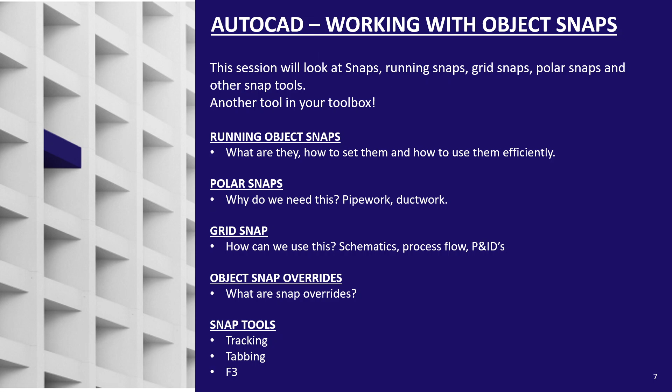So yes, AutoCAD working with object snaps. Now there are different types of snaps: running object snaps, grid snaps, polar snaps, object snap overrides. So what are these? People just say snaps to refer to snapping onto the end point of a line, for example. But there's more to it than that. Okay, so let's have a look then at snaps.

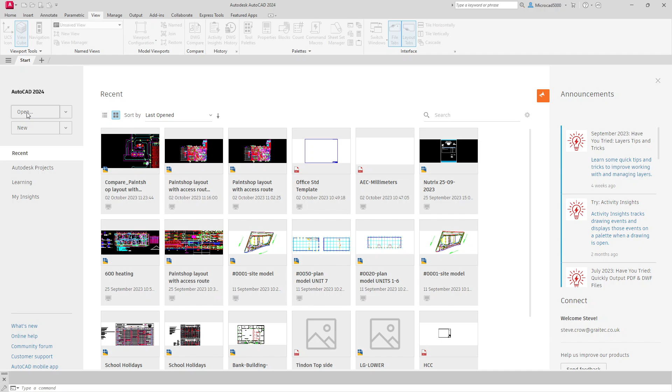Right, let me get into my AutoCAD. So, first of all, let's just look at the bog standard running object snaps. Now, I know some of you may not have used AutoCAD already, but if I just go to open a drawing file, I can open a drawing file here. I'm just using my training file. Why reinvent the wheel? This one here, for example.

So we're going to draw and snap to the center of these circles using what are called running object snaps. Now the snaps are down in your status bar at the bottom there on what are called the drafting aids. That's this bar down here. Now you might notice on mine I have a lot of options displayed down there. Be careful, because out of the box, not all of them are displayed. And some of these settings will slow your machine down when you are working.

So you need to go to the three bars in the corner, click on that, and make sure every last one is ticked, so you can see which ones are active. And this one here is the running object snaps. It's active now, look, because it's gone blue. But notice everything else is turned off. The only one that you would have turned on is this one here. Now I've got it turned off on mine because I've got issues with my graphics card on the machine.

But anyway, little arrow at the side of the running object snaps, and it lists in there the snaps which are active: endpoint, midpoint. A lot of these are self-explanatory, so I'll just run with those for now. So I've got center turned on, look. So it will snap to the center, and also the endpoint snap at the top there is turned on.

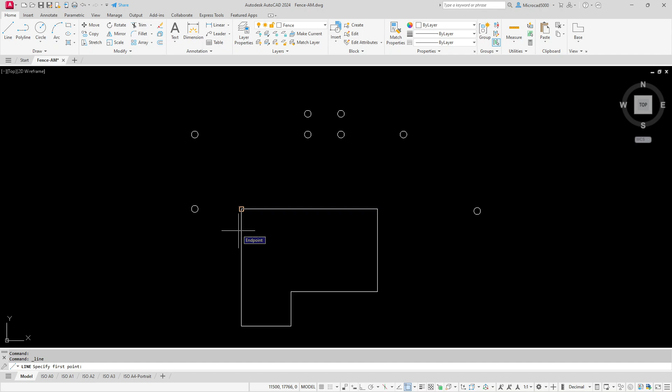I might be telling some people things here that they already know, but bear in mind that there might be people who are logged in who don't know that.

Now I don't need to put my cursor in. It has snapped accurately. Don't try and guess those points. As long as the marker's showing, click. The marker's showing, click, click, click, click. So see how much easier it is to work with these. Click, and there we go. So those are your running object snaps. Okay, so you can snap around there.

Now I'm going to turn on another snap, and I have polar turned on to keep it drawing horizontally. And I'm going to turn on my intersection snap. So where my cursor intersects something else, it'll pick up an intersection snap. So now I can draw a line from the midpoint there, look. My cursor's not in the box, doesn't need to be. There's polar kicking in. When it intersects there, click, it'll find the intersection snap. Midpoint, intersection, down there, look.

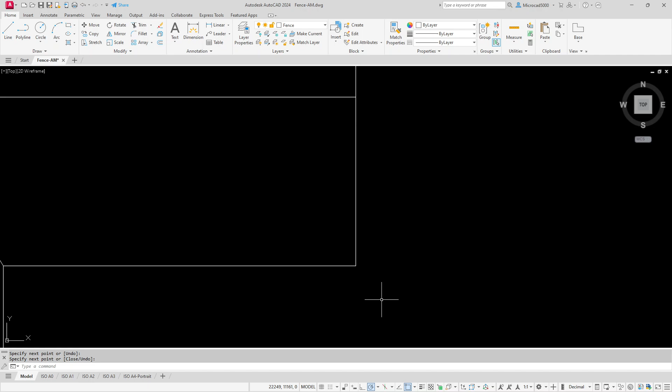Now there's a snap in here called extension. So what does it mean by extension? Let me show you. Okay, so in here, supposing I need to put a rainwater pipe, which is stood off from the corner of the wall there. If I go to draw a circle, go near the end point, if I was to click now, it would click onto that end point and draw my drain pipe in the building. That's no good.

Now with the extension snap turned on, I can hover over that corner, I put my cursor inside the box. When I move away, you can see it's left a blip on the screen. When my cursor's horizontal or vertical, in line with that, i.e. extended, I could say type in a distance of 200 and it will start drawing that circle 200 away. So 200, press enter, and there it is, 200 away. Now it's a 100 mil down pipe, so I type in the radius 50 mil, and there's my rainwater pipe 200 mil away, or however much I set it away from that.

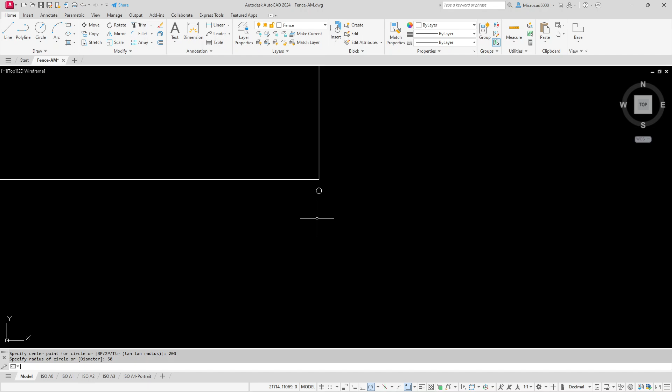It also works on sloping lines. So here, for example, if I say draw a circle and put my cursor on that one over there, look, it's put the blip on, there it is, lining up. There's the extension snap again. Okay. Now if I put my cursor back over that marker, it turns that blip marker off. So now it's not finding the extension snap anymore. So put your cursor over the marker there and it's turned it back on again, look.

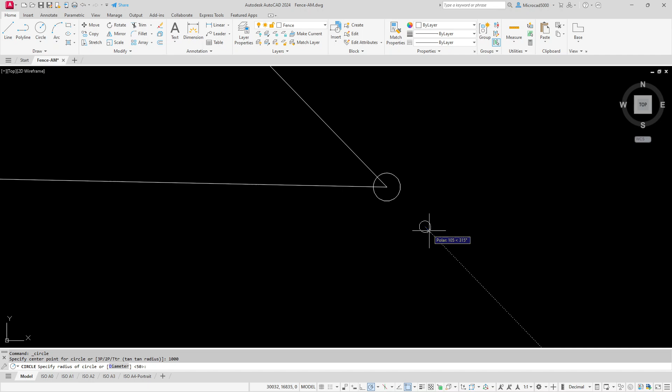So if I type in 1000, it's starting that circle exactly a meter away from that corner with the extension snap down there, and it pops it in there, and I'll put another one in there. I know it's probably a big distance away now. And here, look, I'm going to use the extension snap to follow this wall plate across. So draw a line, hover over the corner, line it up across there, follow the wall plate across, and go up that valley there. So they are your running object snaps.

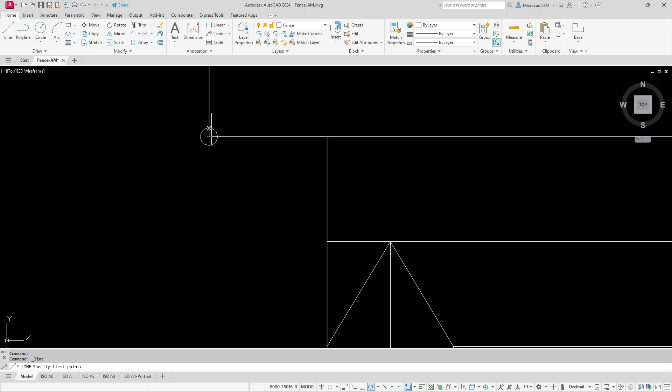Now, that's all well and good using these running object snaps. But what if it snaps to the wrong point? It gets the midpoint instead of the end point or something else. So, for example, supposing I want to draw a line from here, from the quadrant of this circle. Now, at the moment, it's not finding the quadrant. It's finding intersection, center, end point. There's all sorts of other snaps kicking on there, but not the quadrant snap.

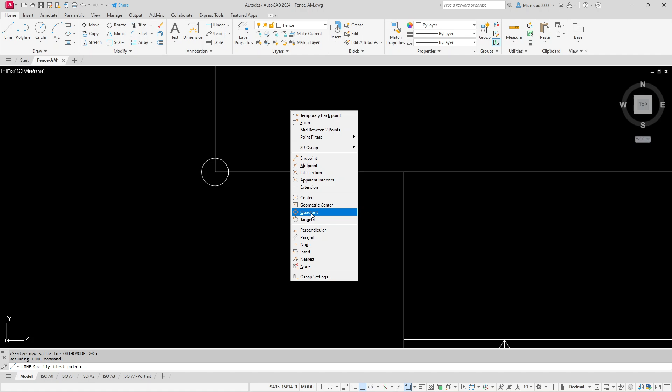So what I can do is I can invoke what are called object snap overrides. And object snap overrides will override the current running object snaps down here. Okay, and one way to do it, hold the shift key down and do a right click on the mouse. And in that list, it shows me a list of snaps, including quadrant. Now, whichever one I pick in that list will override, hence the term object snap overrides, whatever is set in the running object snaps.

So if I select quadrant, it's now turned off center and midpoint and end point and everything else, and it's only looking for quadrants. So if I pick the quadrant, click, I've snapped the quadrant, and now those other snaps have all jumped back in place again. End point, intersection, center, and so on. They've all come back on again. So it only works for one click.

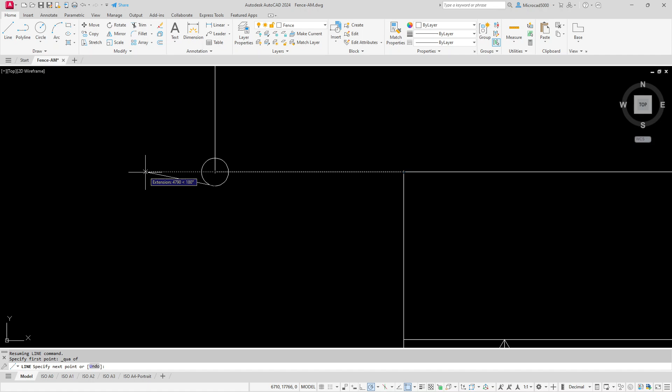If I need to draw to this quadrant here, another shift key held down, right click, let go of all the keys, and there it is, quadrant again, and go and pick this quadrant. So they are object snap overrides. Okay, shift key held down, do a right click.

Let me show you another snap that's in this list of snaps here. One in here called parallel. How does that one work? Let me show you how. I'm going to draw a line which is parallel to this one here. Line command. And draw a line from over here, look. Click. Now parallel is not set, so it's not clicking.

But I can do a shift right click and say, make it parallel, using overrides, make it parallel to this line here. I hover over it, don't click, just hover, and it's left one of those blips on the screen. When this line is parallel to that one, it comes with the construction line and it lights up on the one it's parallel to. Now I can click, and there we go. Those two lines are absolutely parallel.

I could have that set in my running object snaps as well. I'll turn it on there. Line command, starting here, hover over this one, move away, and those two lines are parallel. And I can type in a length of how long it needs to be. I want it to be 10 meters long. And there it is, 10 meters long, parallel to that one.

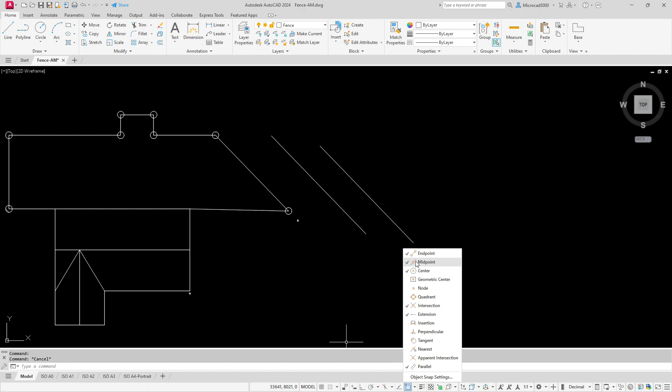So what other snaps do we have in here? End point, midpoint, center, they're self-explanatory. Geometric center, let's look at this running object snap. Let me draw a shape using a polyline. There's a shape with a polyline, C to close. And as we all know, if you use a polyline, this is an enclosed area. In the properties dialog box, it shows you what the area is. So it knows it's got an area.

There it is, look. Now, supposing this is a big concrete slab or a steel plate, I want to pick it up from the centroid, the geometric center of this shape. If I turn on the geometric center snap, I can draw a circle where I would sling this from a crane. There it is, click, and that's the geometric center. If I put that into a lathe centered on that point, it would spin balanced.

Obviously, if that was a big steel plate or a concrete slab, you wouldn't sling it from one point, you'd sling it from the corners, wouldn't you? Although I'm no slinger, the people who rig stuff up on the cranes, I don't know. But there you go, that's a geometric center snap.

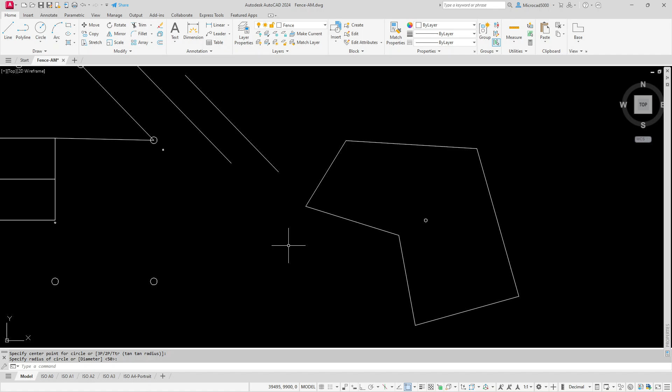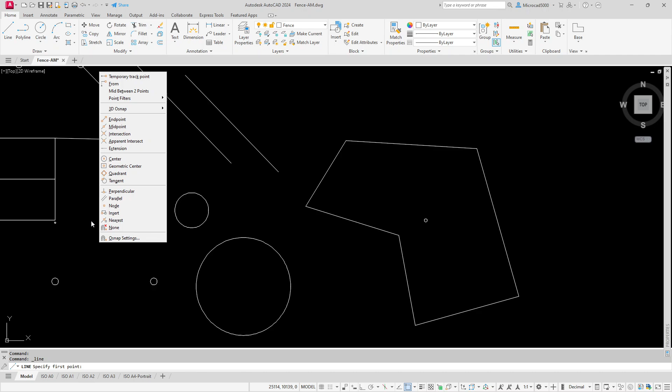What other snaps are in there? You've got insertion point of text and symbols, snap perpendicular to something, snap tangentially to objects. So if I have a couple of circles, there's one circle there, and I'll pop another circle there. I'll do a shift right click, tangent to this one, and a shift right click, tangent to this one. And that is perfectly tangential there.

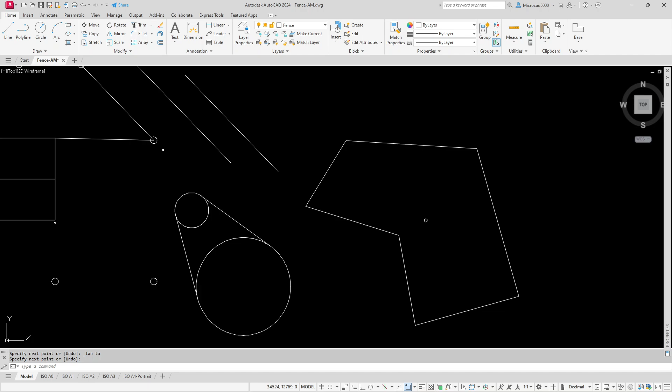Shift right click, tangent on the other side there, shift right click, tangent down there. Oh, wrong way. I messed that one up, didn't I? Delete that one. Let's try it again, a bit more careful. Shift right click, tangent. You need to be roughly where it's going to be. Shift right click, tangent, otherwise it throws a wobbly like that. Garbage in, garbage out. There we go. And then trim it down. There we go.

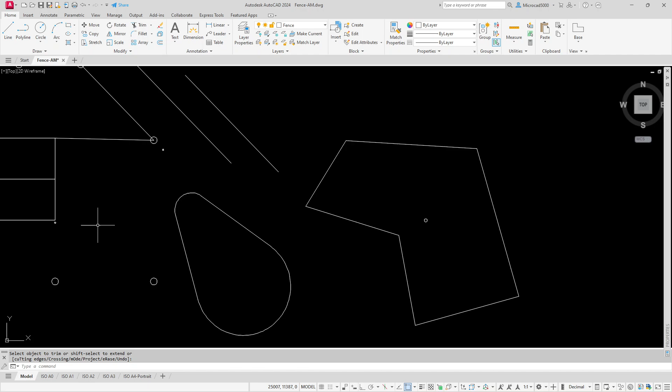Right, what do we look at next? Object snap overrides. So we've done the overrides. Now on the overrides, there's a useful tool, another snap in the override. Watch. If I draw a couple of rectangles there, and then I'll copy this one. Whoops, I didn't mean to do that. Copy that from there with polar turned on across to there. Question for the old hands who use AutoCAD.

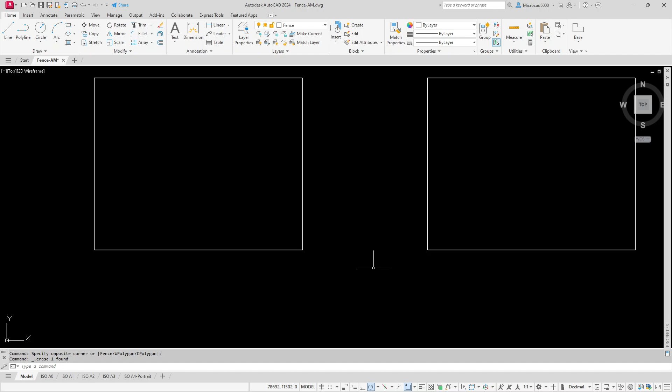How would you draw a line down between the middle of those two? So there's two houses there. You need to draw the garden fence between them, or the fence down there to divide those two properties. What would you do to draw a line in the middle of there?

Well, I suspect a lot of people would draw a line from endpoint to endpoint, endpoint to endpoint, and snap midpoint to midpoint. Yeah, reasonable. You get the required result. But let me show you here one of the object snap overrides. So, line command, shift right click, and there's one in here, look, snap to a point which is midway between two existing points.

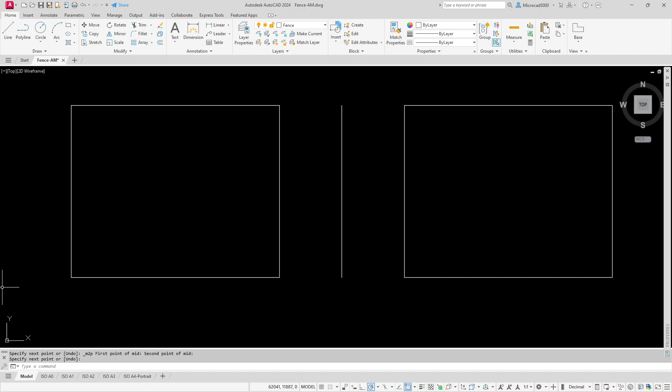Okay, between 2 points. So, the 2 points being this one, click, and this one, click, and there it is. I found the point midway between the 2 points. And shift right click mid between 2 points again, click, click, and there's the center line fence done. Stops any arguments between neighbors sometimes.

But yeah, how easy was that? No construction lines to go back and shift and remove. So on those shift right clicks, some really useful tools. Okay. Right, what other snaps we got in there?

Polar snaps. For you, the HVAC guys, using the polar snaps are really useful for fixing your elbows. So set it to 30 degrees, 45 degrees. So when you are snapping at angles, you don't have to get really weird and wonderful elbows made up specially. So how does this one work with your polar tracking?

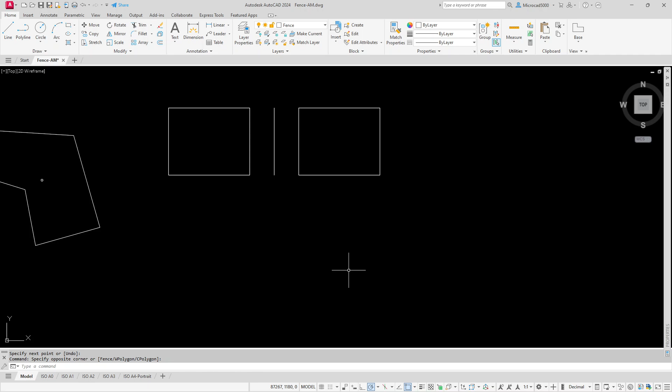Again, I'm just going to open one of my drawing files, and this one is called a drawing called Pattern M. One of my training files. There it is, open it up. Right, turn off the settings down here. Don't need a grid. So with polar then, you are telling it an angle to snap to.

And there's the polar on-off tool, polar tracking, polar snaps. And you can see in here, you have a range of standard angles. So if I go into the tracking settings, I can tell it the angles I want to snap at. 30 degrees, 45 degrees. So you're doing duct work, keep it at 45 degrees, otherwise you're going to get some wonderful duct angles. Or I might do 30 degree ducts as well, I don't know.

If the angle you want is not in this increment list, you can just pick in the box there and type it in there. I'll think of 22 degrees. There we go. So in the list now, we have, oh, okay, I know why. 22 degrees. Okay, on that. I'll look in here. It's gone to 23 degrees. Interesting. I'll just quickly cancel that.

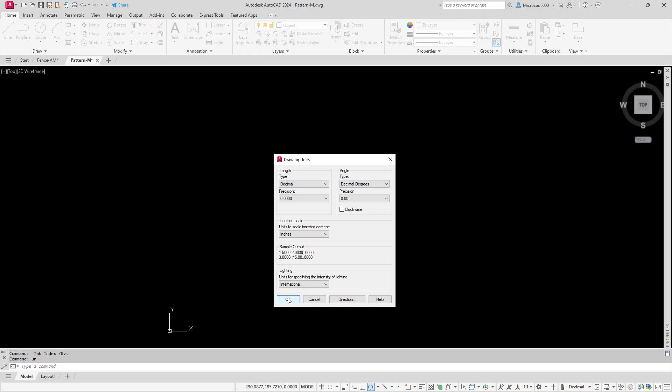Units. Yes, my angle precision is, if I bump my angle precision up, might be better. Okay. Did I type in 22.5? Let's have a look. Tracking settings. No, I typed in 22. Okay, on that.

Okay, don't ask. Right, now I could stop this because it's recording, but I won't. I'll crack on with it.

Right, anyway, for the exercise, I need to have an extra angle in there as well. So go to tracking settings. Down here, look, you can set additional angles. Now, the additional angles are one hit angles. If I turn on the additional angles and type in here 35 degrees, when it snaps around from 0, don't forget, which is at 3 o'clock, it'll hit 0 degrees, then 35 degrees, and then I want to set this increment angle to 45.

An increment angle of 45 degrees, and then 90 and multiples of 45. It won't give me 70 degrees. It's just a one hit angle. So do an OK on that. Oh, sorry, I should just tell something else in here as well. Tracking settings. In here, the angles will be relative to the last segment or relative to the horizontal.

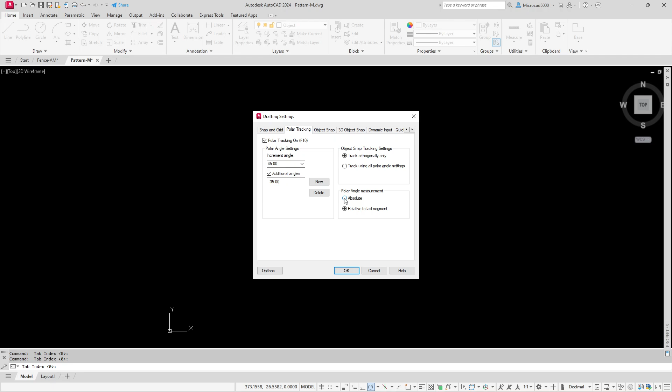Now, if you're a ductwork guy, you want it to be relative to the last segment. So watch out for that. Not a lot of people know about that one. So if the angle is already, say, 20 degrees and your polar angle increment is set to 45, it'll still get you your 45-degree angles on your ductwork and pipework if it's already at 20 degrees. So watch out for that one if you're doing HVAC stuff. Well, anything for that matter. Just be aware of how it's measuring the angle.

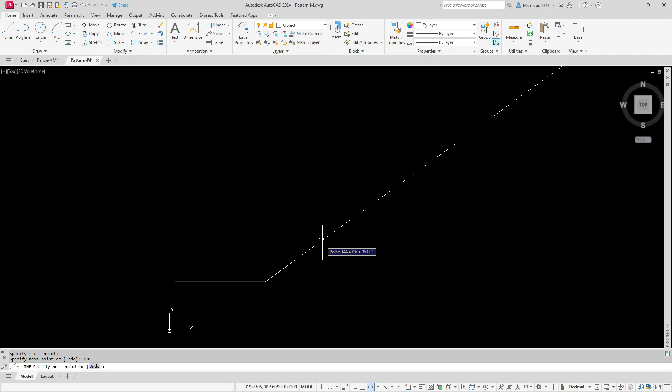Okay on that. Right, so here we go then. So if I draw a line from there, come across, and I type in 190. Okay, so it's drawn across 190. And as I move my cursor around, look, there's 0 degrees. There's the 35 degrees, it tells you on the screen. There's my 45 degrees, and then multiples of 45 degrees, look.

There's 90, and a multiple of 45 is 135, obviously 180. Come back around again, there's the angle of 225, and then 270, and back round to 315 degrees, and there's my back to 0 degrees. So that's your polar angles. Okay, so that's polar tracking with that tool there. Useful tool for doing pipework and ductwork.

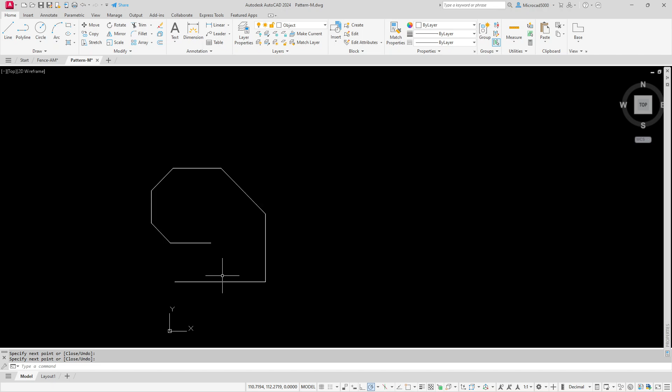Right, now it's okay drawing with these angles and snaps, things like that, but sometimes you need to place an item which is where a couple of objects line up. So for example, I want to draw something just in here where that line meets up with that one there. Now there is nothing there. Now people would normally draw a line, with my snaps turned on, from there across to there, and another line from there down to there to find the intersection to draw the objects there. Now that's old school, you don't need to be doing that.

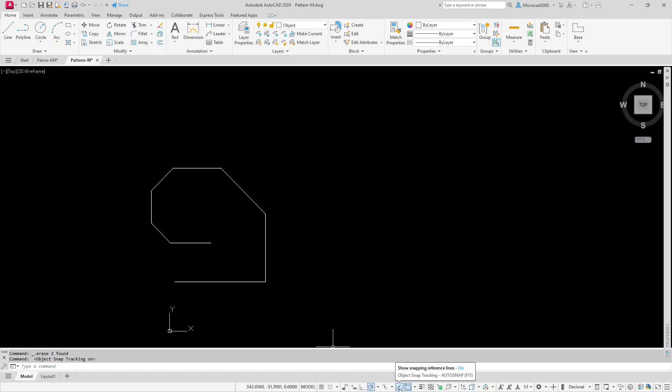You need to be using a tool called Object Snap Tracking, and it's the tool to the left of your snaps. There it is, look. If I click on that, that's turned on my snap tracking, and watch how this works. So if I say draw circle, from this corner, now there's the extension snap. It's not an extension snap because it doesn't work horizontally, look. This is Object Snap Tracking. It works from two directions or more, and there we go. When those two line up, click, and it popped my circle in there. I'll try it again here, look. Hover, hover, and line them up, click, and draw my circle.

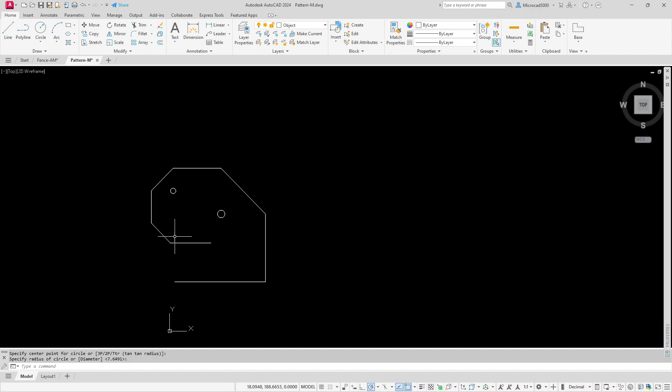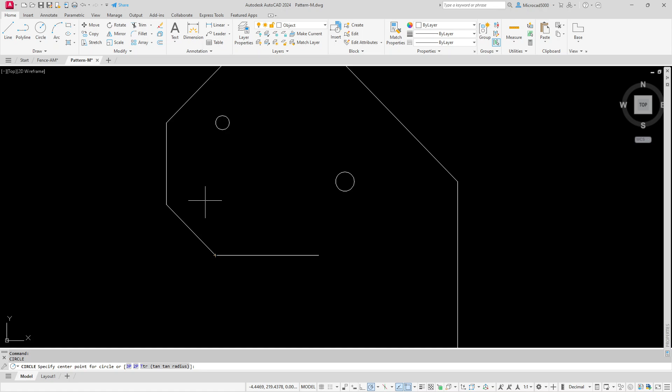Now if I hover, it puts the mark on the screen there. Hover, and it's put the mark on. If I zoom or pan around, it turns those marks off. So you can turn them on. If you've got too many turned on, there's all sorts of things flashing up on the screen. So it's now lining up with that, there's all sorts of things flashing on the screen. You might get the wrong pick point. If you zoom in and out, there you go, it's turned them all off. And then hover, hover, line it up, and press the enter key to draw the circle. So that's Object Snap Tracking. Okay.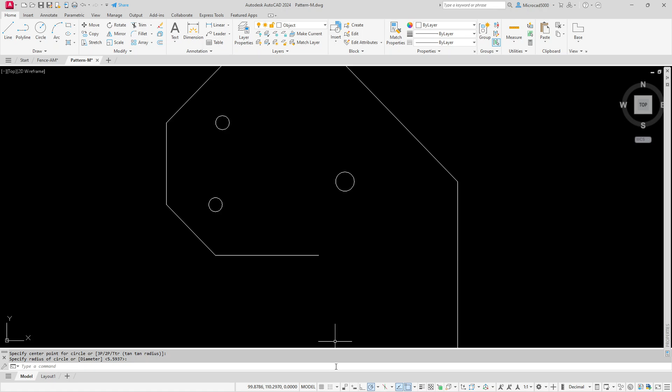What about a grid snap? So those of you who do P&IDs, schematics, process flows, and that kind of thing, you need to be working to a grid. Now, if I turn the grid on, there it is. It's down here. Look, there's the grid on the screen. I just zoom in. There we go. And you can also turn the snap to this grid as well. There's the snap to the grid. So turn that on as well. Okay. Now you don't need these on anymore, because now it'll snap to this grid on the screen.

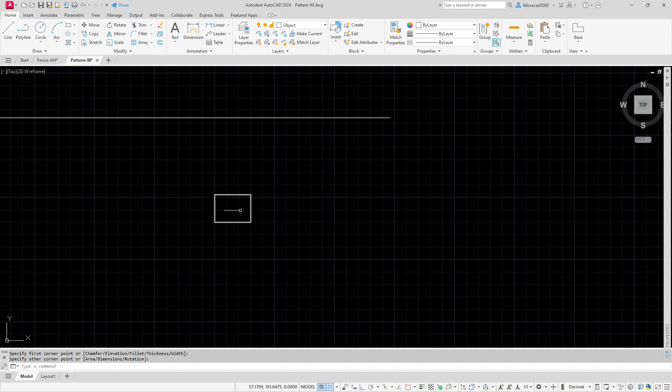Now you might think, well, why is it not snapping? Because my cursor is moving smoothly across the screen. And the reason is I'm not in a command that can use it. So if I go into, say, the rectangle command, now, okay, just check my snap settings. There we go. Zoom out. Rectangle command. I can now go and draw on that grid. Look, I can go and draw on the grid.

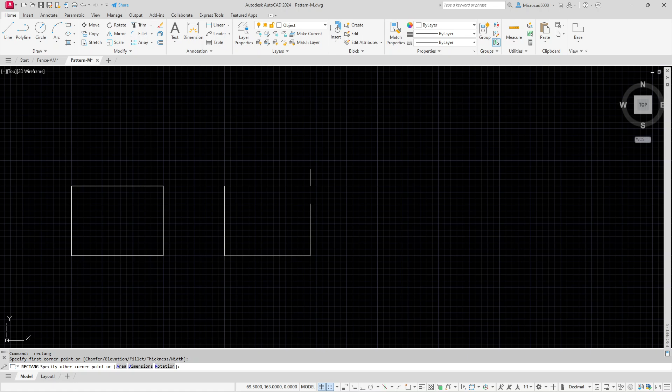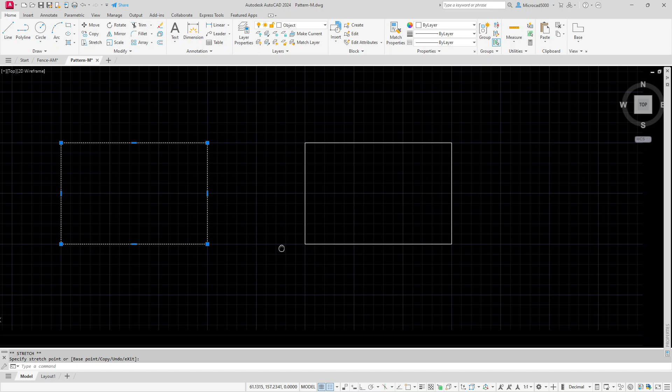There we go. I'm cocking this up somewhat rotten. And it's snapping to those grid points on the screen. Okay, I should have set it up really. But you can get a consistent size with those objects. That's not consistent. Oh dear. If I grab that polyline there and pull it down the grid. There we go. Drag it down. You can see what I'm trying to achieve here, but not making a very good job of it. There we go.

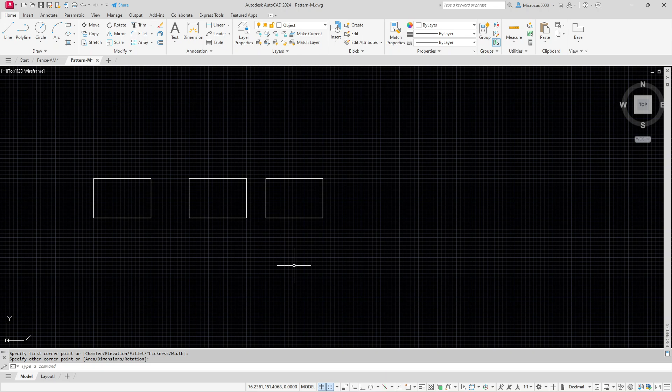So, keeping it consistent. When you're placing symbols or anything like that, it'll be in a consistent spacing between them. So that's useful for P&IDs, schematics, and that kind of thing. Okay, right now, another tool I'll show you with your snaps is something called tracking. If I just open another drawing, I know the settings are correct. Open this drawing up. Okay. So if I just draw myself a rectangle, starting there at 380, 200.

There's a rectangle drawn. Supposing I need to place a hole or a slot or something in here, which is a certain distance away from this corner. Now there's nothing lining up, so I can't use object snap tracking. I can't use object snaps. I need to find something in here. So I can use a tool called tracking. Watch how I use this tool. So I want to track from this corner along by 50 and then up by 40 to define an area in here.

Now, you could do it by using the offset command, but I need to explode that rectangle first, another step. When I did the offsets, that would have created more construction lines, so I'd have to go back and erase afterwards. So watch how I draw this circle using a tool called tracking.

So, circle command. When it says where's the center point, I turn on tracking with the letters TK and hit the enter key. So on the command line now it says tracking first point. With my object snaps turned on, I can click on the corner here, look. Click, and it's tracking across the screen, look. Left or right, or up or down.

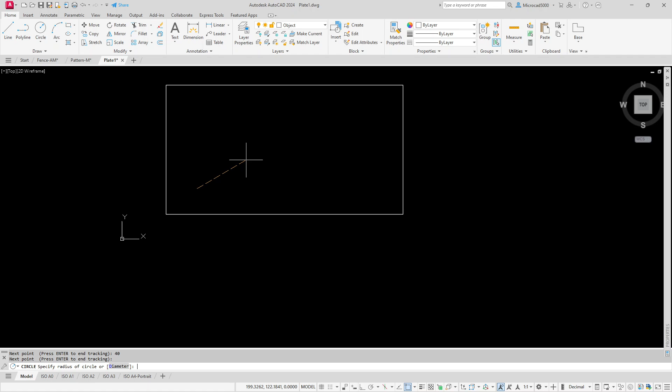Okay, so if I track across to the right and type in 50, hit enter, I can now track up or down. If I track up by 40, there we go, and I can track up, down, left, right, backwards, forwards, anywhere I want until I reach my destination and hit the enter key, and it starts drawing the circle with a radius of 13. So there we go, there's one hole drawn.

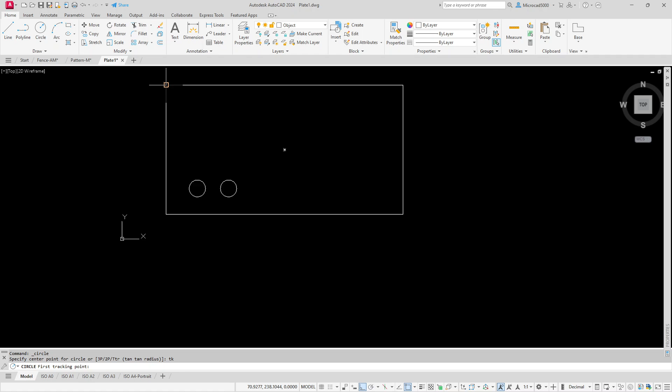I do the same thing again, circle, turn on tracking, click the corner and track across by 100, okay, and up by 40. There's the next circle drawn. Circle center radius, TK for tracking, click the corner, come along by 50, come down by 40. There's the next circle, circle, TK for tracking, click the corner, come across 100, come down by 40. And there's my two circles created.

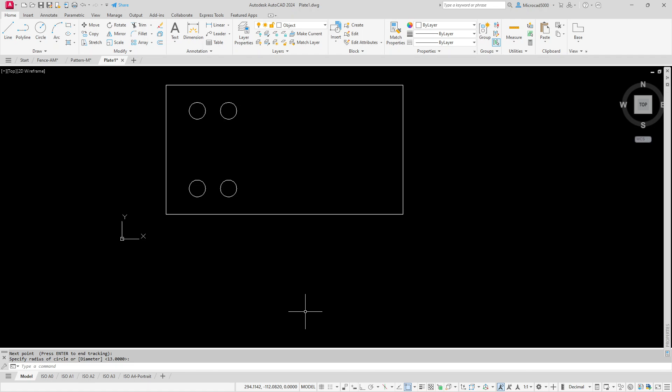So now with my quadrant snap, I'm going to create a couple of slots here. Quadrant is turned on and draw a line. Quadrant to quadrant, quadrant to quadrant, and then trim those out just like that. And there's my slots created. No construction lines, didn't have to explode the outline. So using tracking, TK to turn it on, it just helps, makes the job easier.

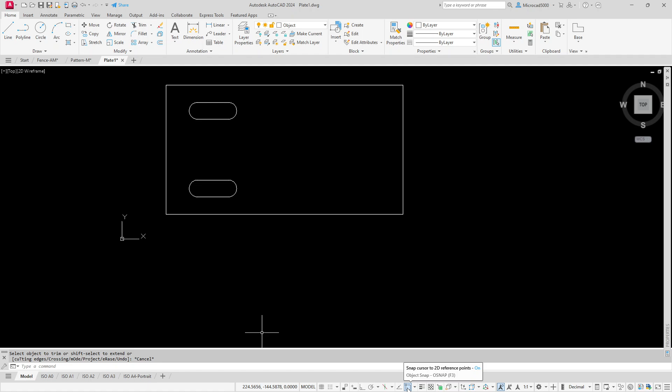Now your snaps down there, you can turn your snaps on and off, because sometimes when you're working, it'll kick in with a snap point. You don't want it to kick in. I'm going to draw from just there, look, and the snaps are kicking in. But if you press the function key F3, it turns the snaps off. So you can go and draw, and then F3 to turn it on. F3, it's now turned off. Look, I can draw on there. F3, it's turned back on again.

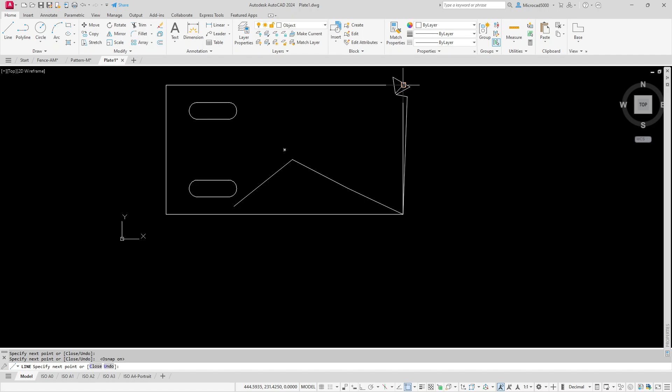Now, I'm in an area there, and there's lots of snaps kicking off. Have you had the situation where you're trying to snap to something, and it goes to the wrong snap point? You want intersection instead of end point, you want midpoint. Now, while it's got the snaps on the screen, if I start pressing the tab key, watch what happens. I've left my mouse alone, I'm just pressing the tab key, and it's jumping around all these snap points in that area and gradually working its way out from where my cursor is. You see that? An end point, and it highlights the object.

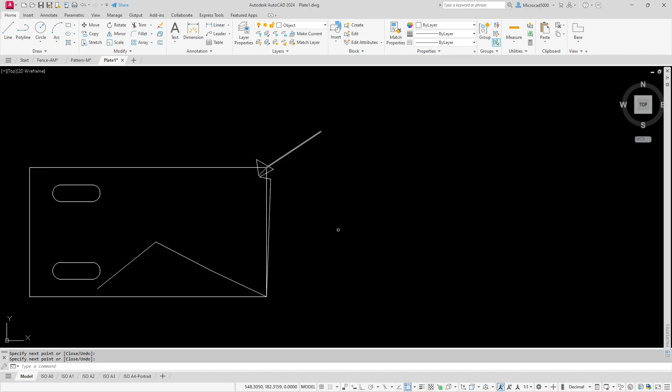So if you've got concentric circles and you pick in the middle, how do you know which circle it's snapping to the center of? The answer is you don't, and yes, you press the tab key and it'll jump around all those points. Tab, tab, tab, until it gets to the right one. There we go. I'm going to get the corner of the rectangle, not those lines, because those lines may be incorrect. My rectangle is highlighted, it's showing the endpoint snap, and now I click with the mouse. And I know that's accurately found that endpoint of the rectangle, and not that mishmash of lines which could be inaccurate. So pressing the tab key, it cycles around all the snaps in the area. And don't forget F3 to turn those snaps on and off.